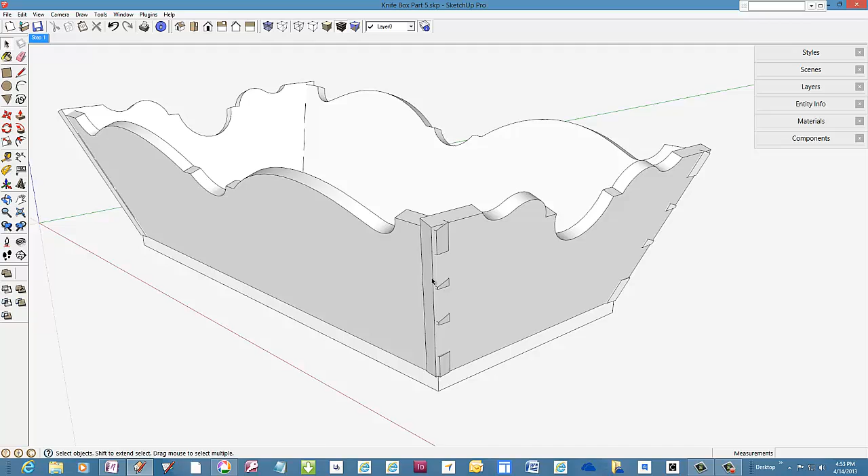In part 4 of this series, I showed making the dovetail pins in the side component. In this video, I'll show how to use these already made pins to create the matching tails in the end component. Here, as I pull the side forward, you can see that the matching tails have not been made in the end component. To get started, I need to pull a copy of the side and end components away from the assembly.

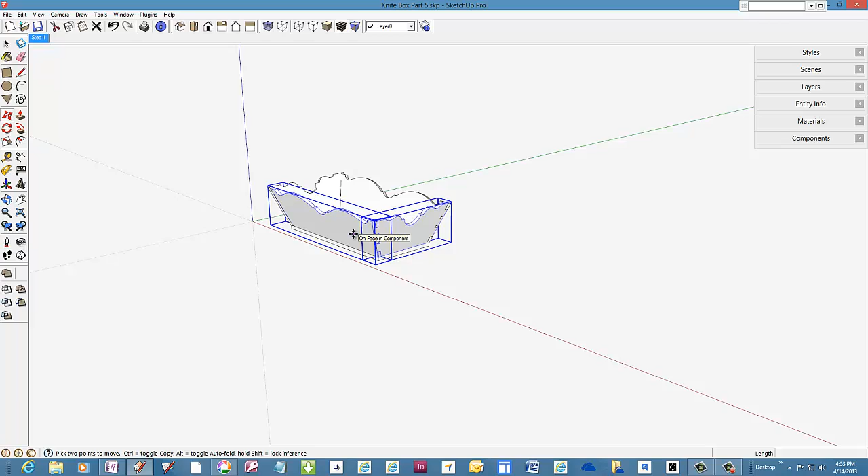I want to take advantage of the pins that are already on the side to accurately cut the tails on the end.

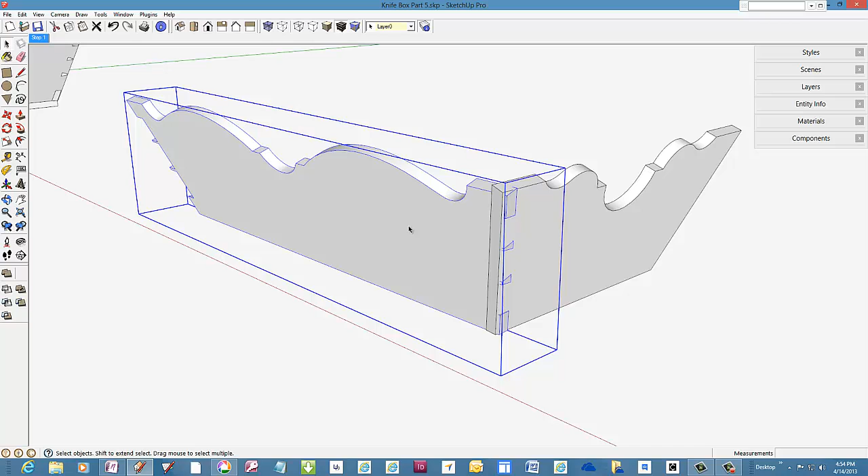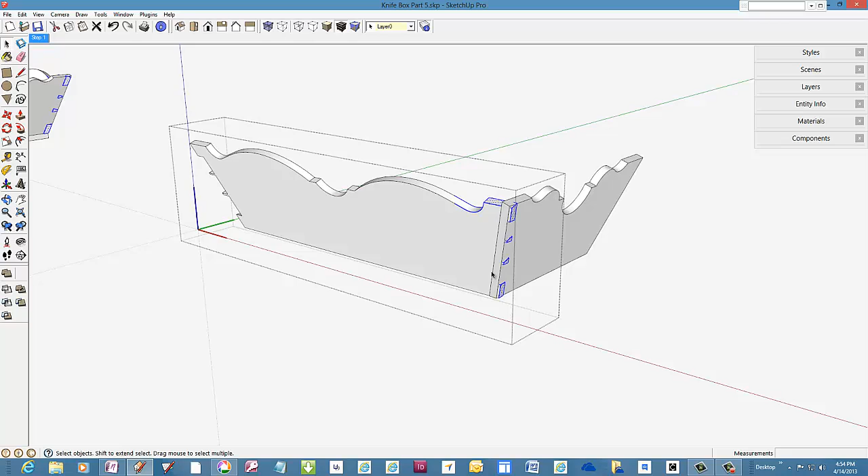I'll copy the pin geometry and place it within the end component. Edit the side component, draw a select box around the pin geometry, then copy this geometry, close the side component, and then delete it.

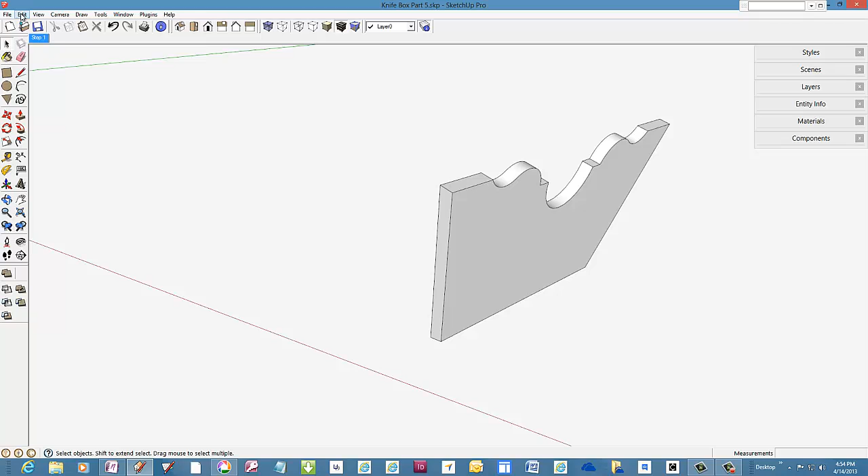Open the end component for edit, and do a paste in place command under the Edit tab. This installs the pin geometry within the definition of the end component.

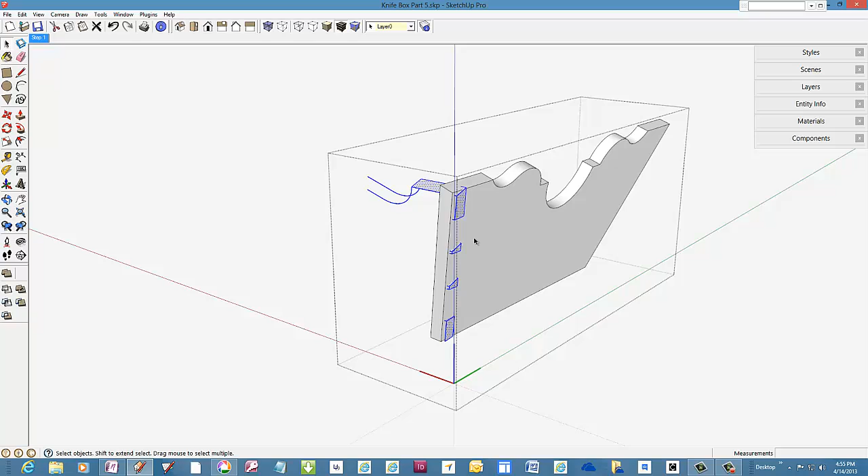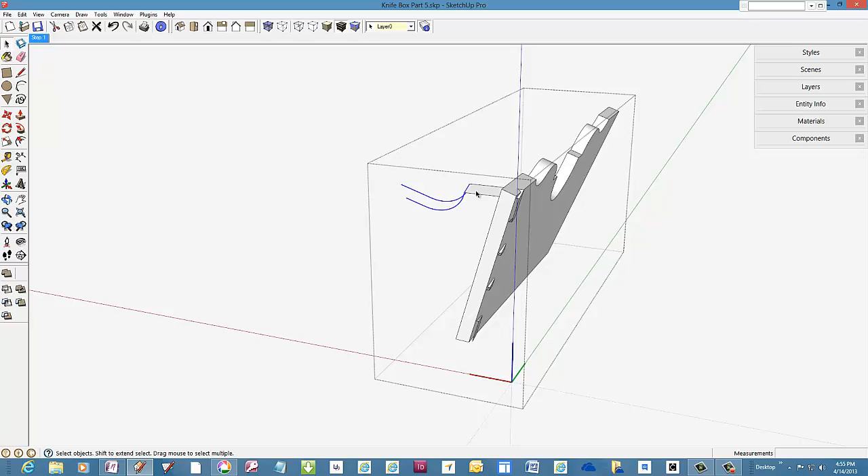To make sure all the intersecting lines are created, I'll select all and do an intersection with selection command. There's quite a bit of cleanup here before constructing those tails, since these two intersecting parts are not collinear and do not fully overlap, which creates some extra work here.

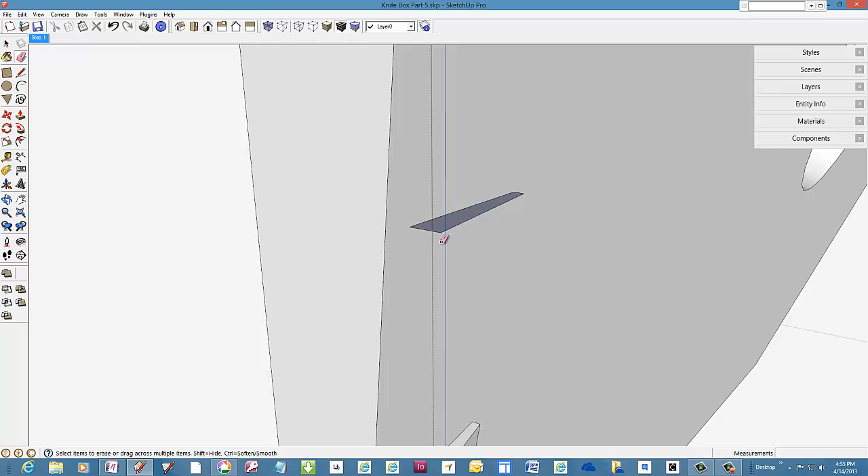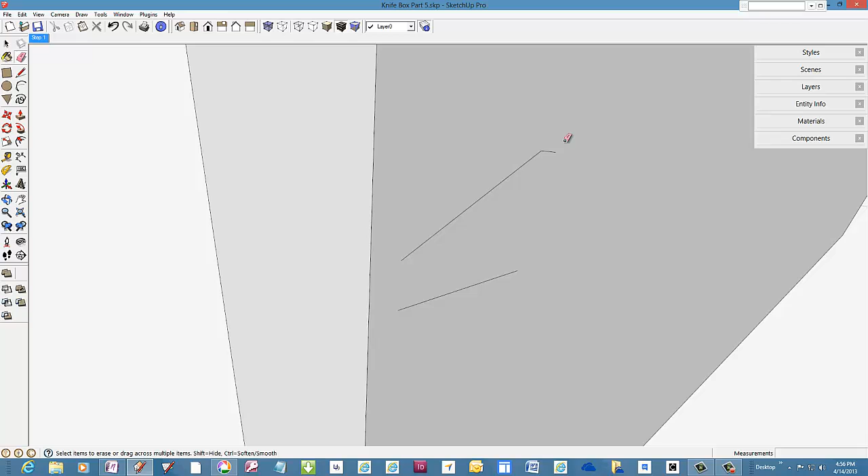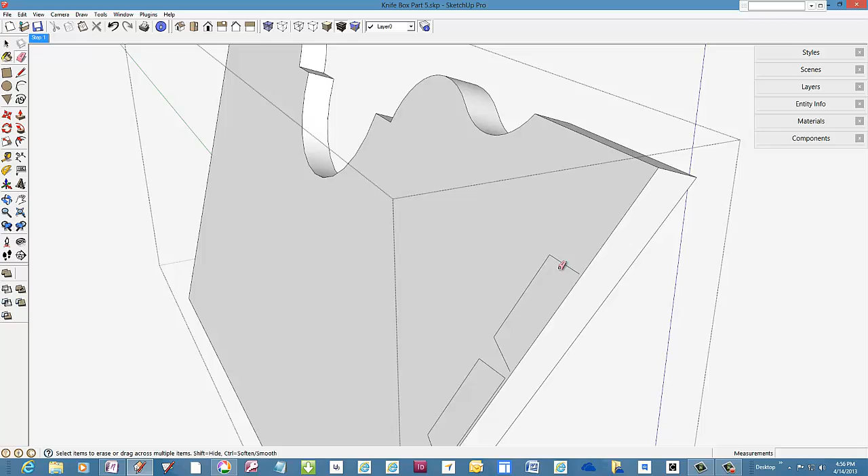There are protruding parts here of the pin geometry from the side that need erasing, leaving the important elements, the lines, to show where the tails will go in the end. Additional lines on this face, on the inside face, can be erased.

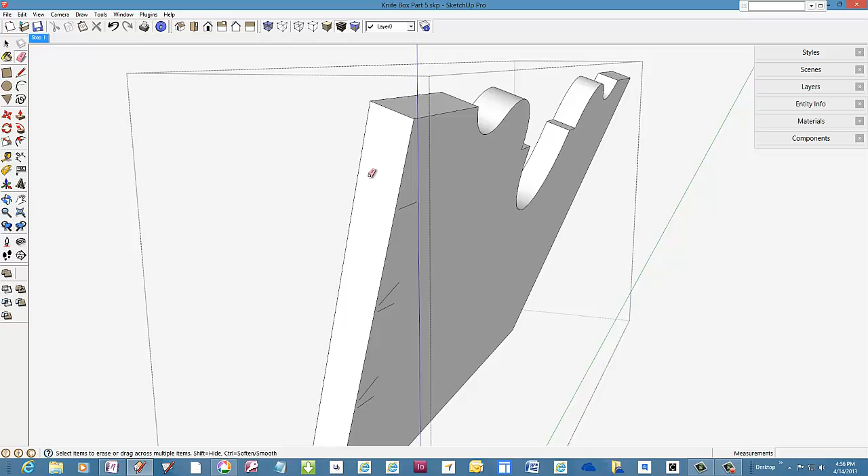There's still some more cleanup, and I'll change to X-ray format to see inside the end component and erase additional edges that won't be used.

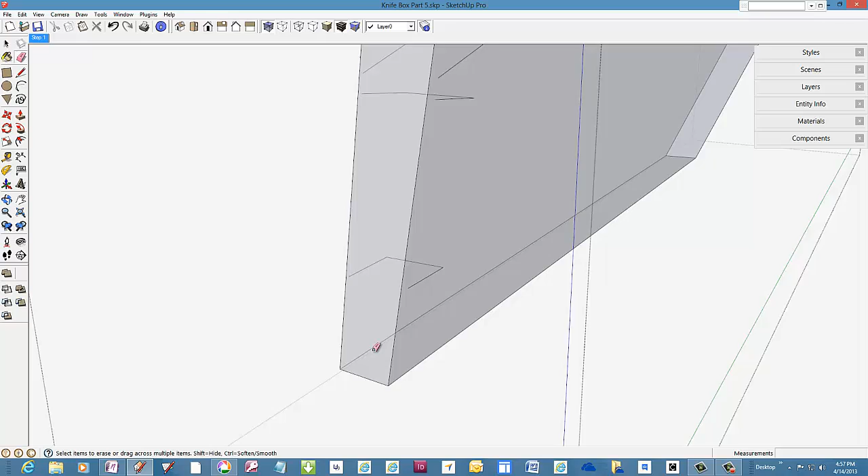Placement of guidelines is going to be a great help in this process. Then with the line tool, I complete the tail geometry.

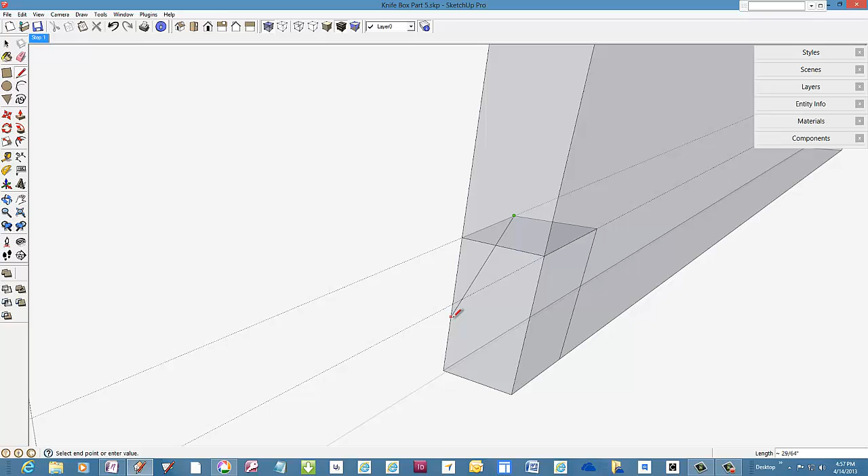You want to zoom in close while doing these line extensions, and watch and see that the face appears. To get a parallel line here, start the line, then touch the edge and watch for the magenta color.

Okay, that's good for one socket. Here's a socket for a dovetail pin.

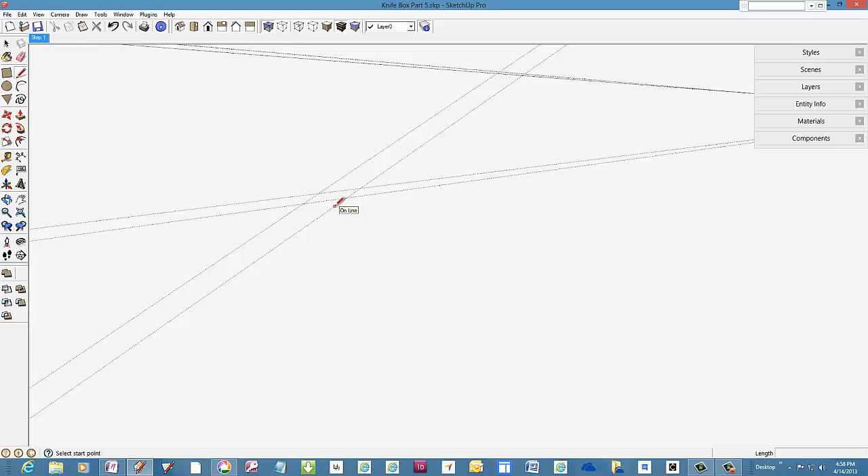Again, use the tape measure to create collinear guidelines, double-clicking on the lines. Then with the line tool, complete the geometry by extending here, crossing over on the edge.

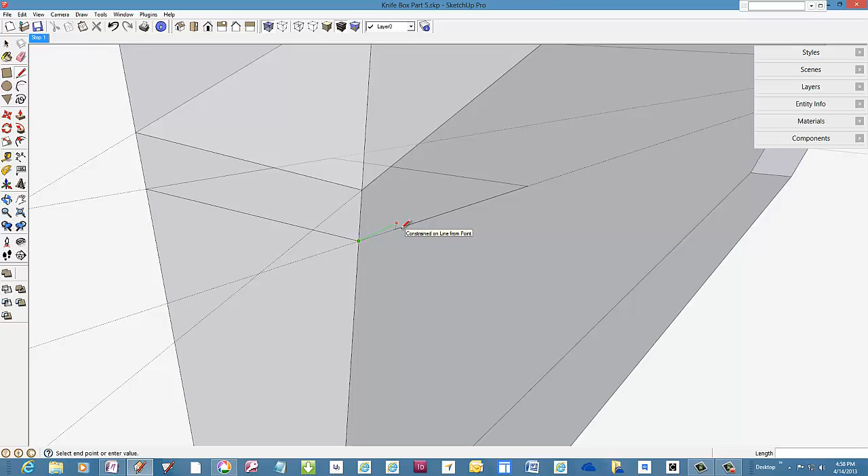Watch for the inferences, the little X's that show that you're at the intersection point, and it tells you when you're on this end point or line to create that face. We need some vertical edges back here in the back at the corners. Now we've got a socket.

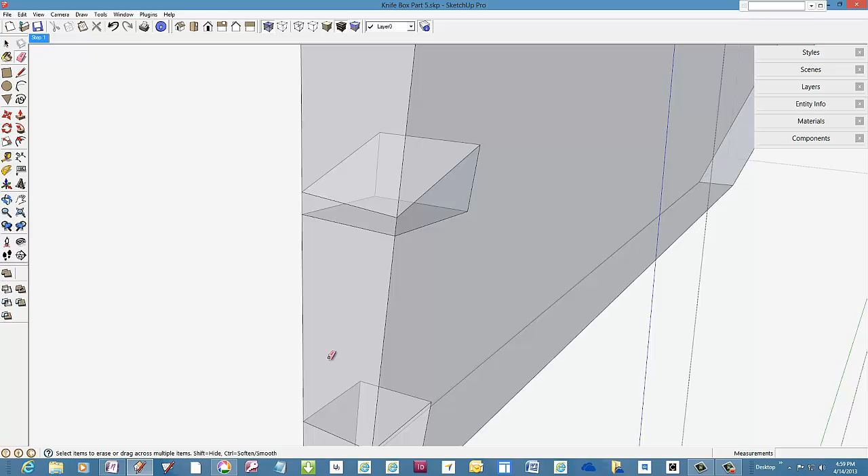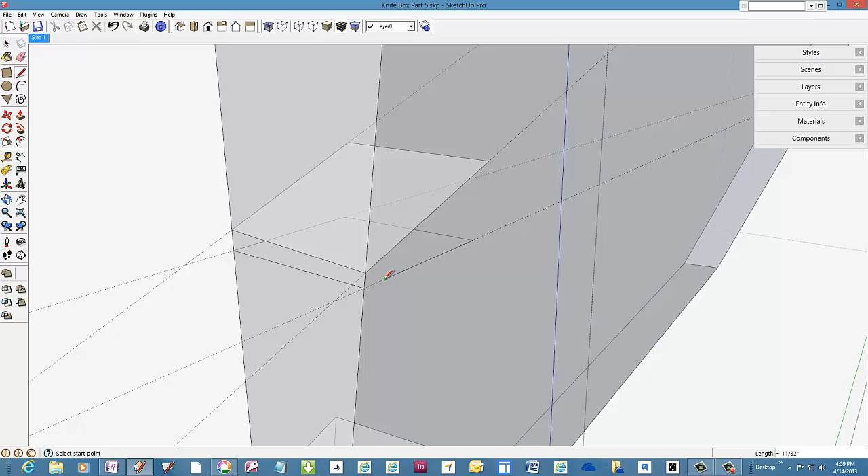It is important to zoom in closely and watch these inferences. Otherwise, you run the chance of not connecting exactly to the existing line endpoints and not connecting at the proper intersection. So watch for those little X's, watch for the endpoint word, and then you're safer and you will have these faces appear properly.

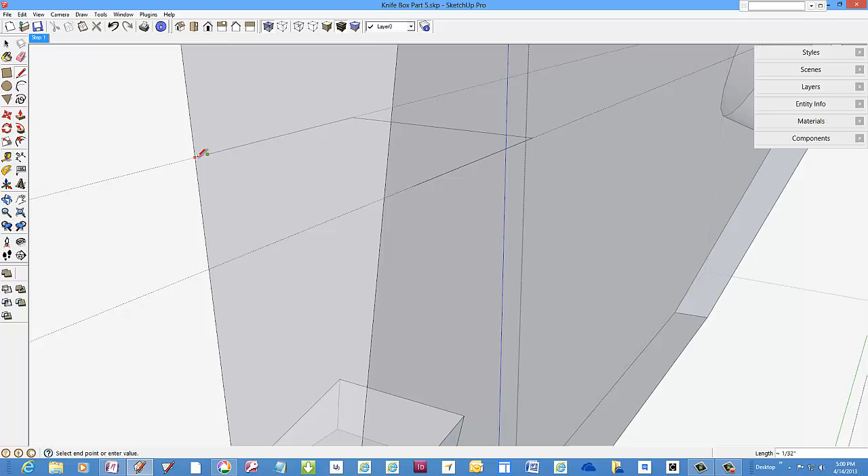I don't like to have a lot of guidelines in my way while I'm working these things. They get cluttered, so I delete them as soon as I can get rid of them. Here's the last socket up here on the top corner.

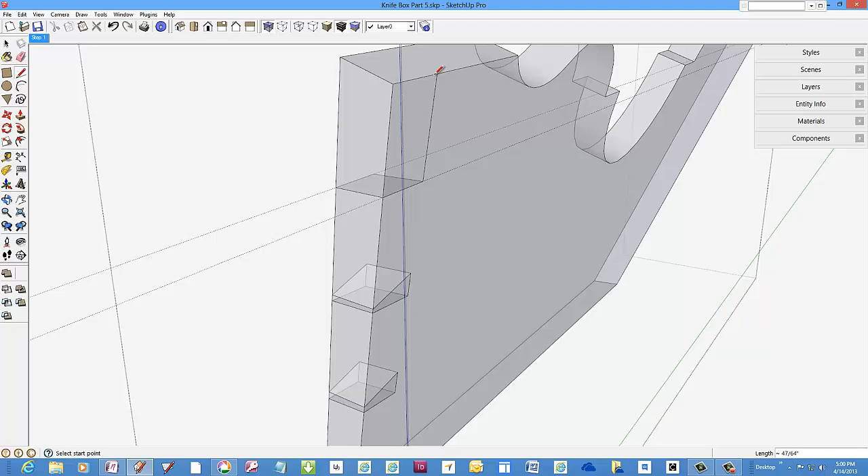And again, we've got some parallel lines. Touch the edge, watch for magenta, click. Another parallel edge back here, watch for the magenta color and then come across.

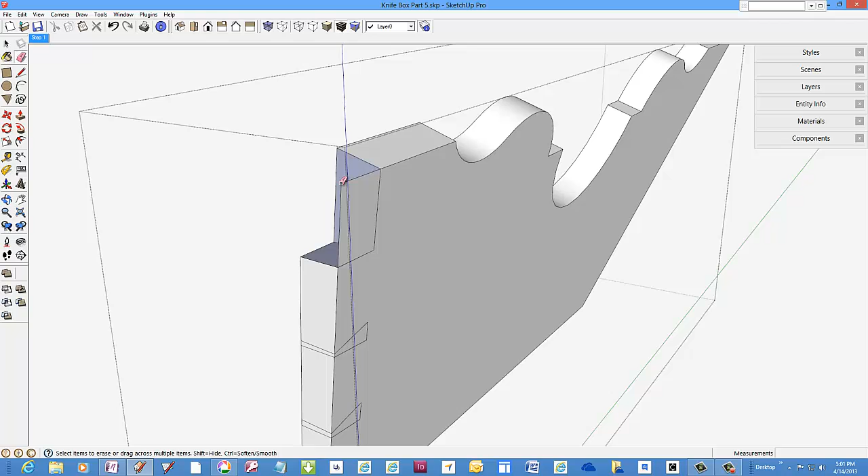Now we can turn off the X-ray and delete the waste in the open sockets. Some faces may show the wrong color, the back side, so use the menu to reverse faces. Click that edge out of there, open up the socket, change the face.

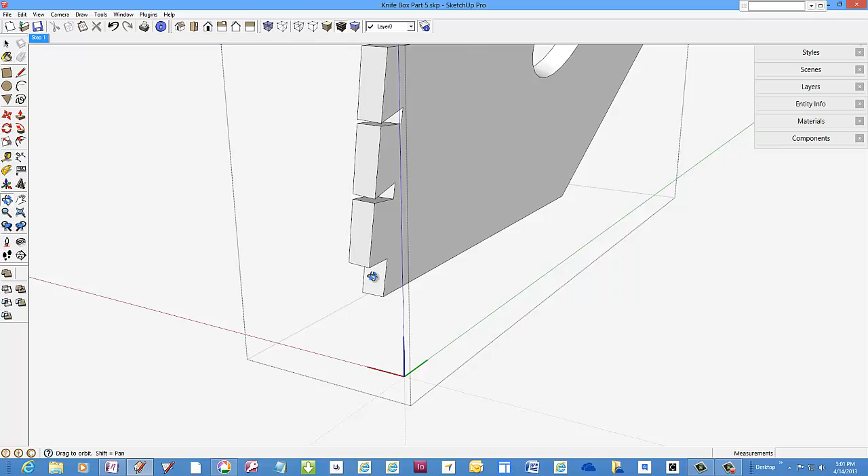That completes the tails on one end of the end component. Let's copy those, the end dovetails.

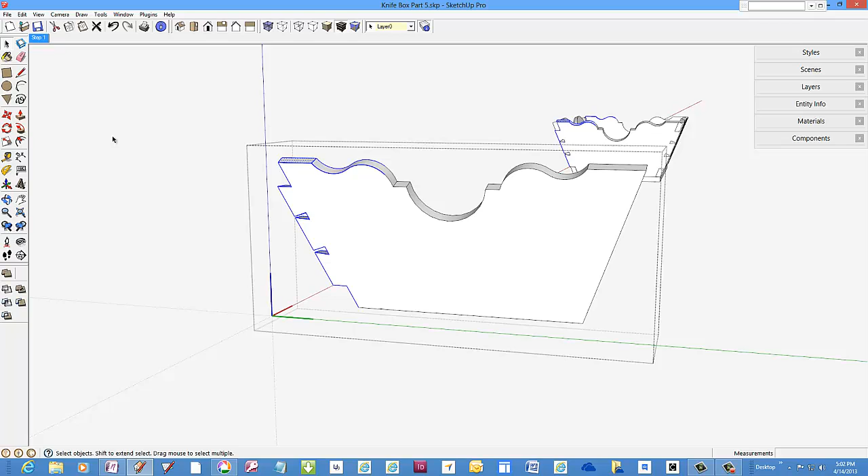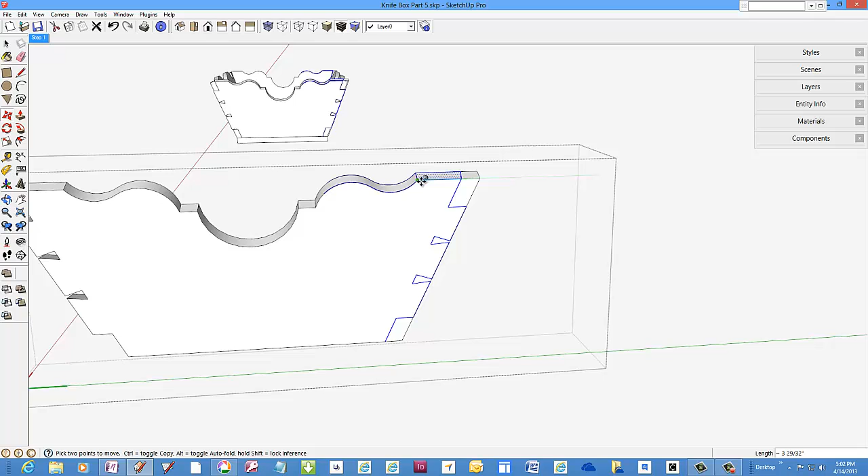Copy, move, now I'm down the green axis. Flip it along the green axis, and move it back into precise position. This little intersection meets up with that intersection.

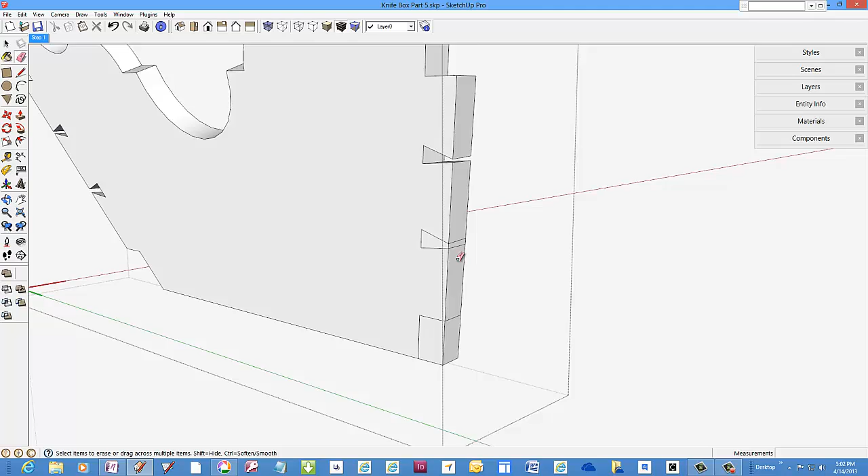Pick the eraser tool and again knock out the waste. Okay, we can close the end component here and erase it. We don't need it anymore.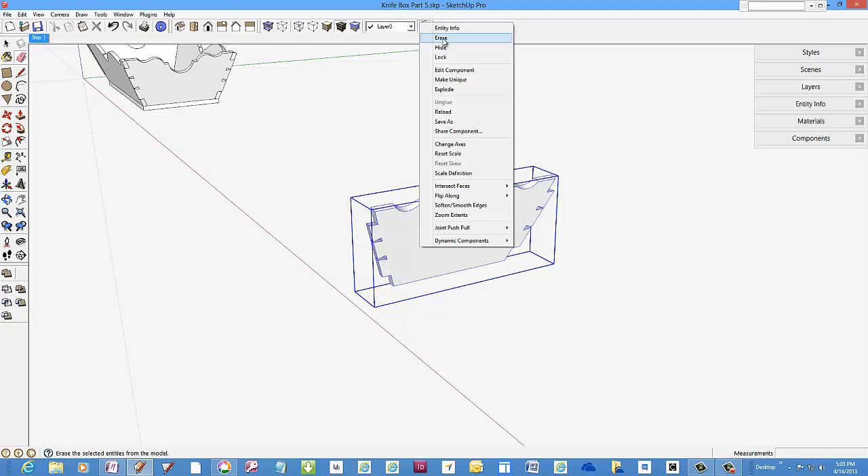The ones that are back here in the assembly are now fixed, and let's inspect for the perfect fitting dovetail joints.

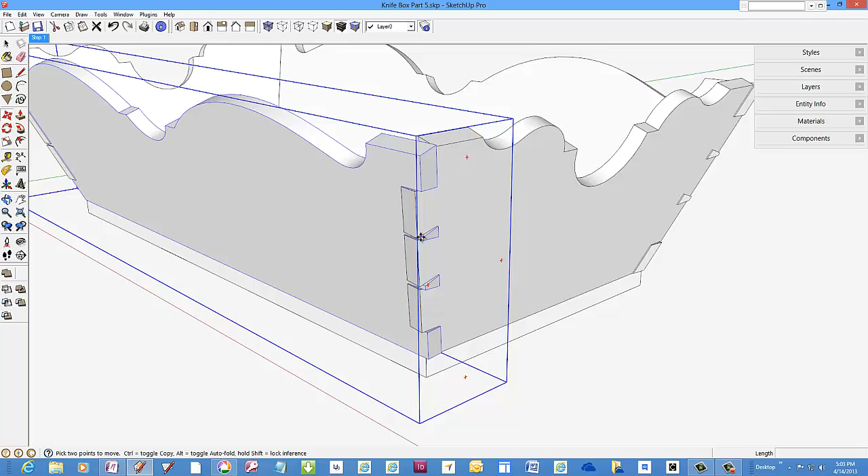We zoom in, we can see some extra protruding material that will be just enough in the shop construction to plane flat faces after gluing up. That completes the compound angle corner joints.